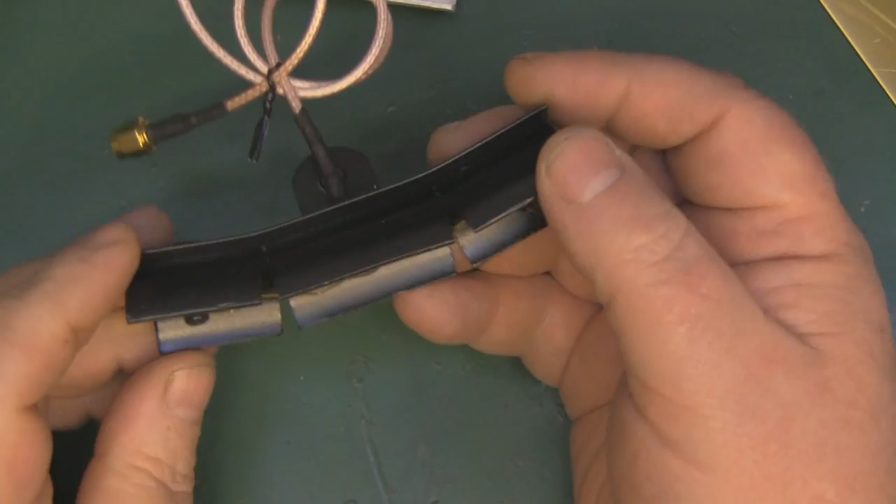So I've got a new antenna design that I want to share with you in this video. It's a double biquad that I've designed specifically for FPV at 5.8 gigahertz.

Now it's pretty unique because what I've done, I've bent the reflector as you can see here, and what that allows the antenna to have is a much wider beam width, which is what a lot of people who fly FPV, especially quite close in, want from an antenna. They want quite a bit of range, but they also want a much wider beam width, and sometimes that's pretty difficult to achieve with some antenna designs.

So I came up with this design after I made the latest biquad build that I released. I filmed it in between Christmas and New Year, but I only released it a week or so ago. But this is the idea that I came up with off the back of that design.

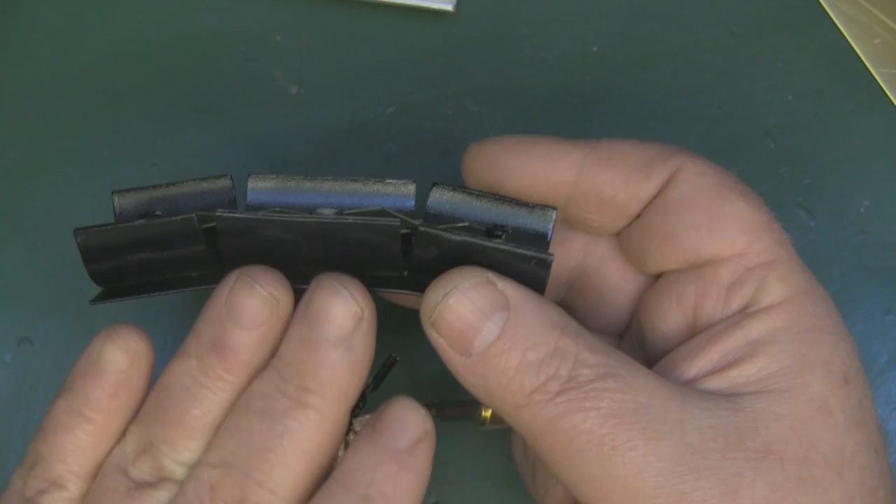So it's going to be a bit of a long video. I'm going to show you all the steps that are involved to produce one of these double biquads for FPV. So let's jump straight into it then, and I'll show you some of the materials you're going to need on the bench.

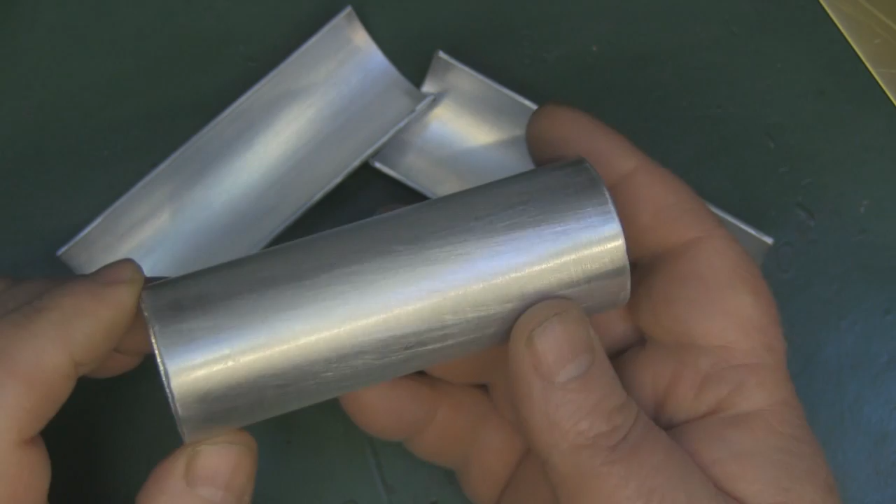So the main body of the build for this antenna then is some aluminium tubing. Now this aluminium tubing I picked up off eBay. You can pick up meter lengths of this pretty cheaply, and it's 34 millimeters in diameter with a 1.5 millimeter thick wall, and you need to cut off a section that is 100 millimeters in length.

Now the next thing you're going to have to do is cut the tubing in half. If you've got access to a bandsaw, it's pretty straightforward to do on a decent bandsaw with a metal blade. I cut this in half using the Dremel and a cutting wheel, but again, even if you've just got a hacksaw blade, as long as you take your time, it's quite soft material, aluminium - well, this aluminium is anyway, so it's not that difficult to do.

So I think we can move on to the next part of the video, because I don't have to show you how to cut a piece of tubing in half.

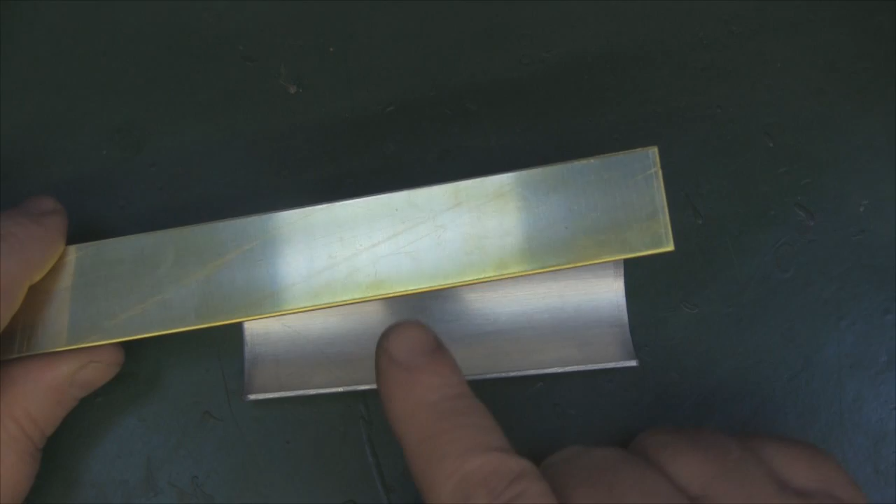So once you've cleaned your reflector up a little bit, I've just rounded off the sharp edges here with a little bit of emery paper. We are going to be painting this, so you don't have to get in there and polish it up. But I've got a piece of brass here, and you can use brass, copper, a piece of tin from a cookie tin, something like that, recycled. It doesn't really matter. You just need something that you can solder onto.

Now, so what I'm going to be doing is cutting off 100 millimeters of this brass strip here. I can't remember how wide this brass strip is - it's 25 millimeters wide, and what I'm going to be doing then is using all my marks where I'm going to drill the hole to rivet this on the back of the brass here. So I'm going to cut this off at 100 millimeters.

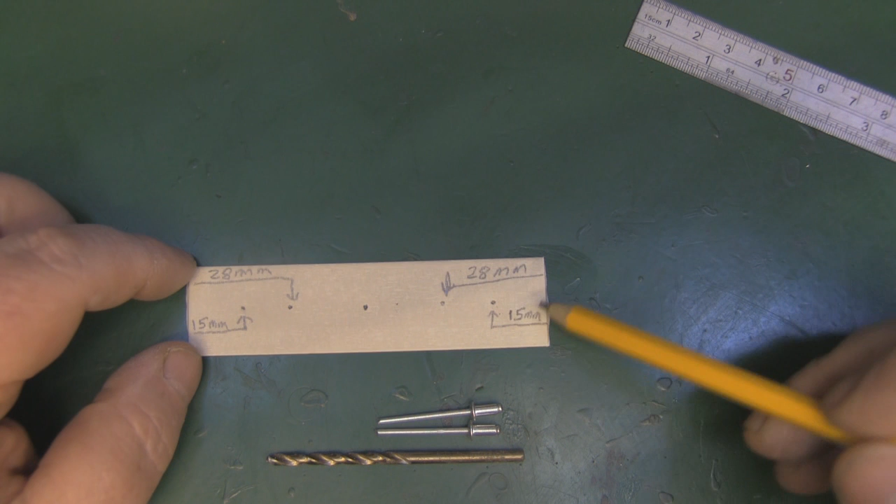So I've marked off where I want my holes on the brass strip here. I've also punched them out as well to make them a little bit easier to drill, and I've written on here the measurements that these holes need to be at. Now the first hole is going to be for the connection for the coax, so that's in the center of the strip. The hole here near the side is the one that's going to be the nylon post that supports the element itself.

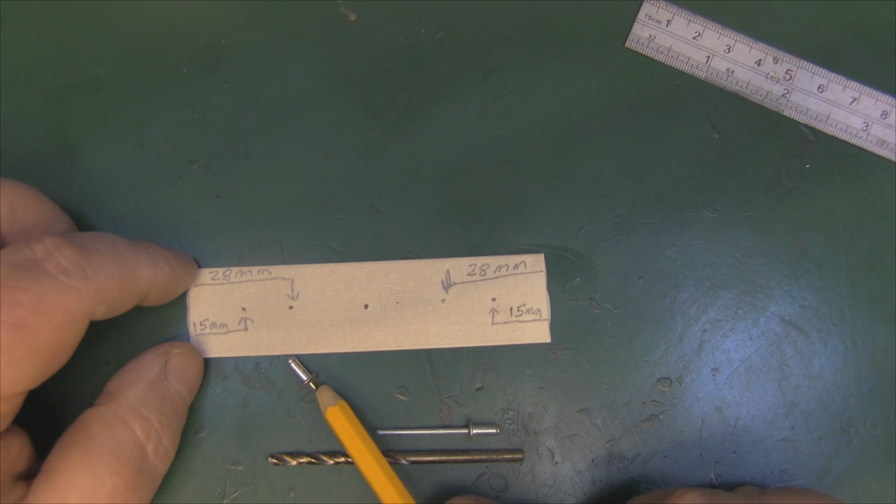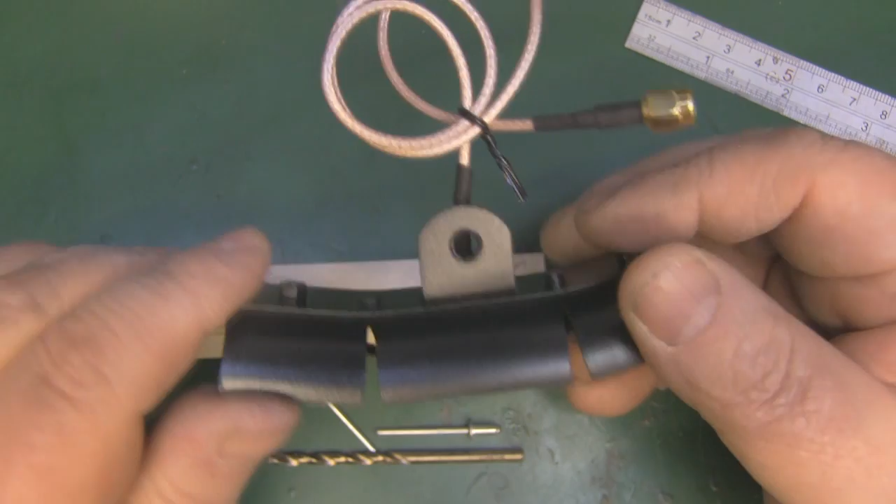And that's 15 millimeters in from the side here in the middle of the strip. The next one is the hole for the rivet we're going to use. The rivets are 3.2 millimeters thick and 5.5 millimeters long, so the rivet is going to go in here, and that's 28 millimeters from the side here. So basically we've got a hole for the rivet here, and then we've got a hole for the nut for the nylon support to hold the element in place, and the same on the opposite side there.

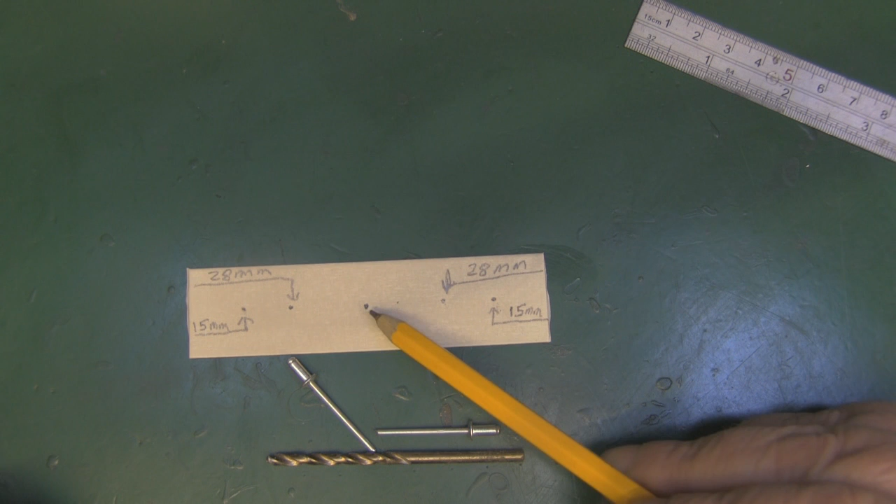I am going to be connecting this double biquad here with some semi-rigid coax, so we're going to do something a little bit different than what we've done on this one. But basically that's where you want to drill your 5 holes here, and I'm going to be drilling the middle one a little bit wider because I'm going to be using some copper tubing to attach the semi-rigid coax to.

But these 2 holes here and these 2 holes here, I'm going to drill with this drill bit here, which is 3.4 millimeters in diameter, so just a little bit bigger than the rivets themselves, and that's plenty wide enough to connect the nylon post to as well.

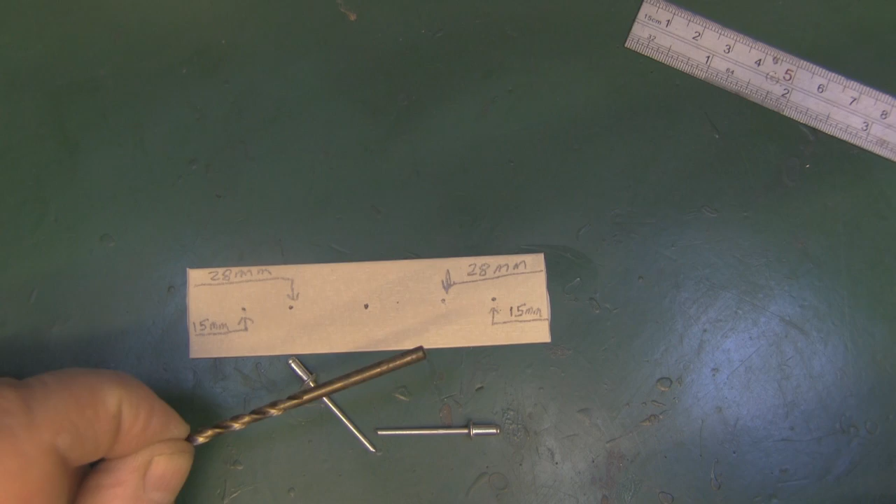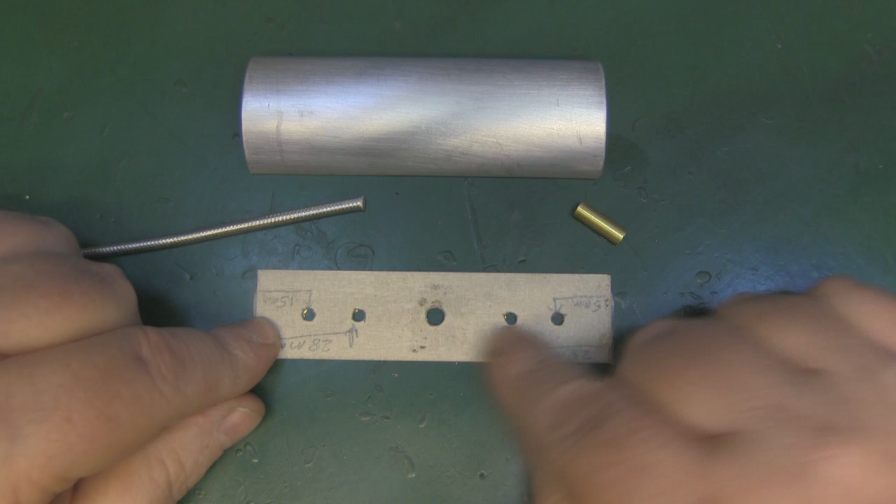So I've got all the holes drilled in the brass plate now, and I'm going to use this much thinner brass tubing, which is 5mm in diameter. It's just a little bit thinner than the copper, so it's easier to work with and solder in place. That's going to hold this semi-rigid coax, add some strain relief, and hold everything nice and secure in place.

I've drilled a hole through the brass plate there, the same diameter. So what I'm going to do now is attach this to the reflector with some masking tape, and use this as a template to drill the holes in the reflector. But then what I'm going to do is remove this and cut the little slits down the side of the reflector to get that angle, to get that much wider beam width.

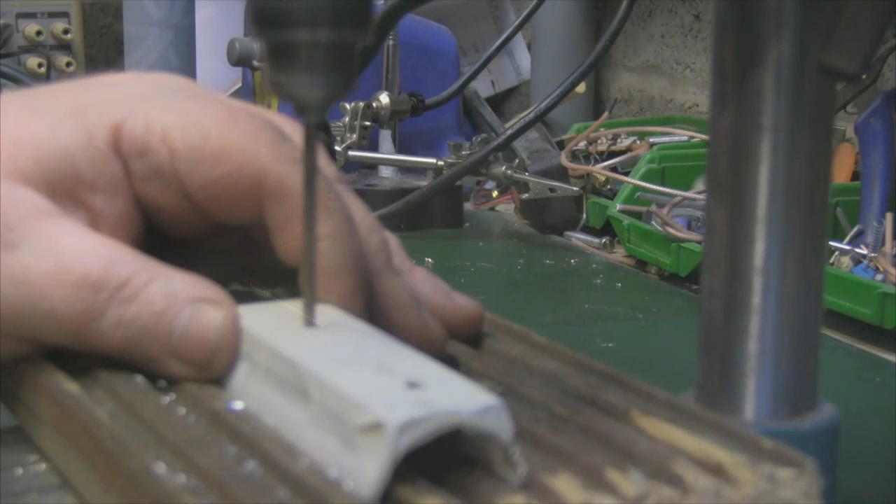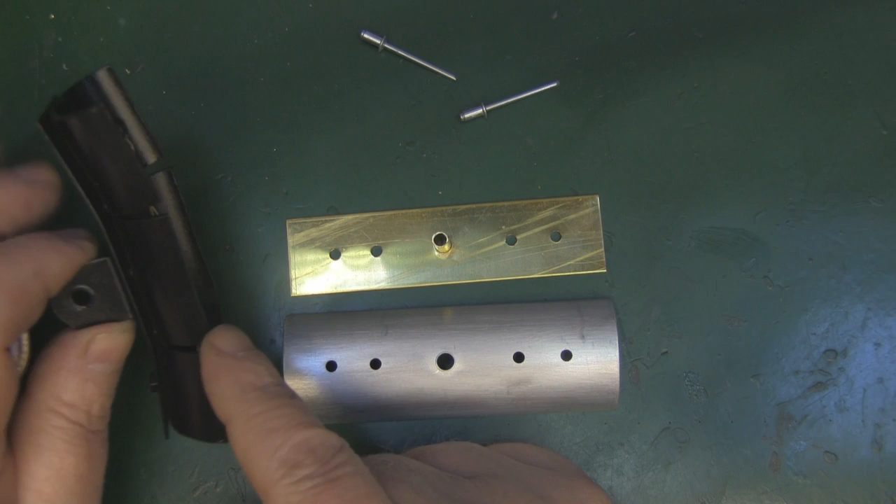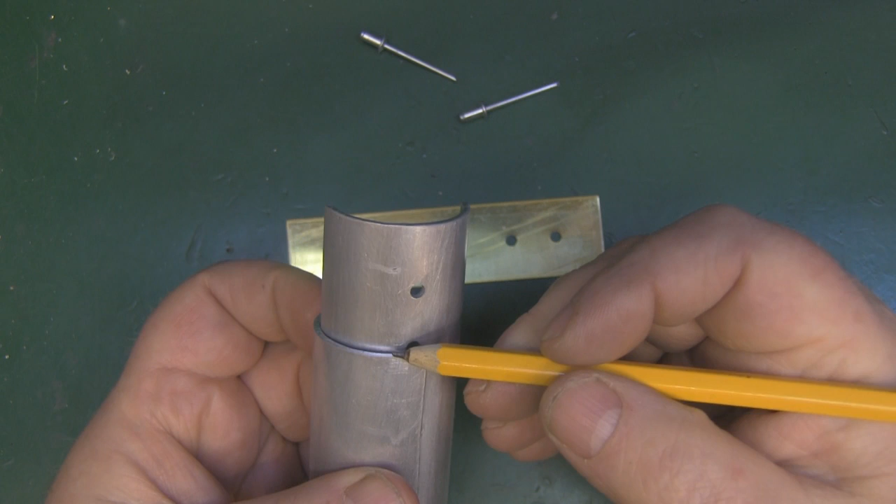Before we go ahead and permanently attach the brass strip to the aluminium reflector, we need to cut out a slot like I have here, so that will enable us to bend the reflector back to increase the beam width of the antenna. Now I want to leave about just over 10mm, 12mm width across here and here that I don't cut into.

One thing you can use to help you get a nice straight line around this curve is to get the second reflector that you cut, the opposite side of the tubing here, place it over this one, line it up about center with this riveted hole that we're going to rivet in place, and then you can draw a line down here and it'll be nice and straight like so. You can do the same on the opposite side as well, and that'll give you a nice guideline then where you can cut out your slot.

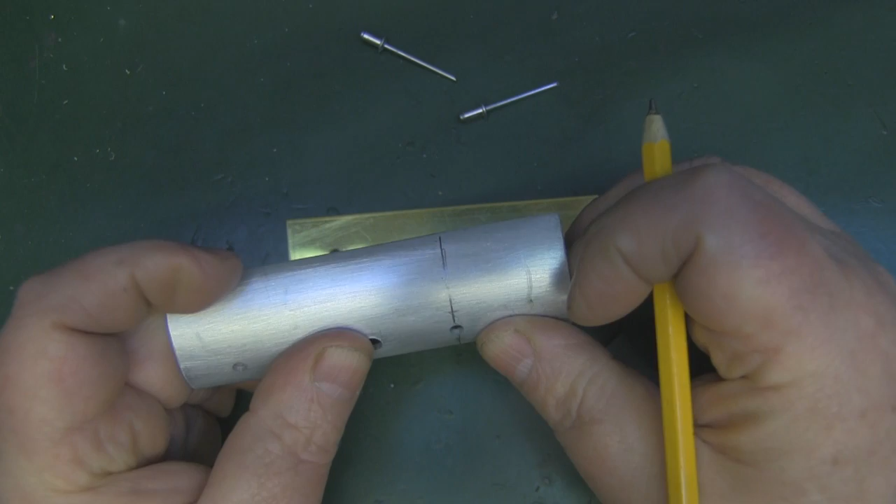But remember, we need to leave about 10mm or 12mm here and here where we don't cut into, and that will enable us to bend the reflector back to get that increased beam width.

So I'm now ready to start cutting the slits, and if you've got access to a bandsaw with a metal cutting blade, it's pretty straightforward to do on a bandsaw. Unfortunately, I'm waiting for a metal cutting blade for that, so I'm going to use the Dremel. Just have to be careful that it doesn't jump, and make sure you use the Dremel away from you.

But I've got it held in this vise, so what I'm going to do first is just score a line where I'm going to make my cut. And now I'll cut into it following that line there. It'll help guide my Dremel cutting tool here.

So now that we've got the slits cut in the reflector, I've also gone ahead and deburred the sides with this small file here, just gone in there and ran it across each cut that I've done. It just helps to deburr any sharp edges on there. But as I say, we're going to be painting this, so you don't have to worry too much if you scratch the aluminium. I'm going to rivet the brass plate into place now, and then we can put the bend in to get that slightly wider beam width.

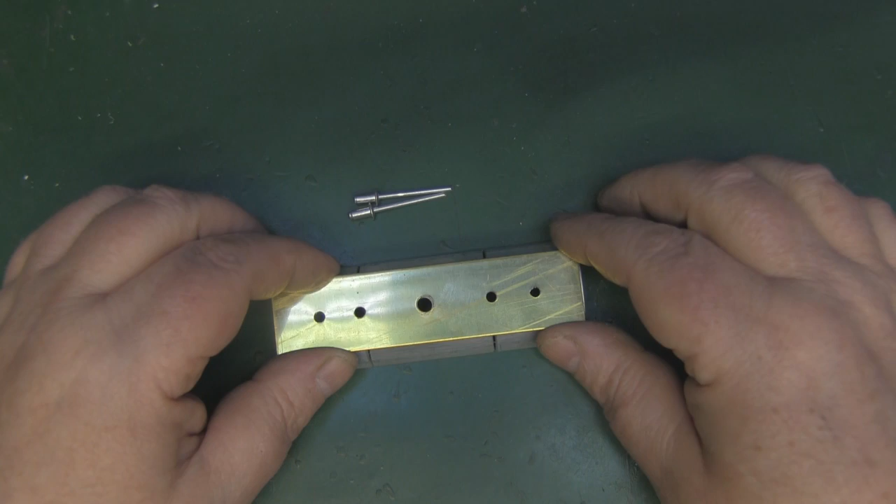I'm going to put the best side of the rivet on the inside of the reflector here, because that's the bit that's going to be on show more than the back of the antenna, just to give it a clean look to the construction.

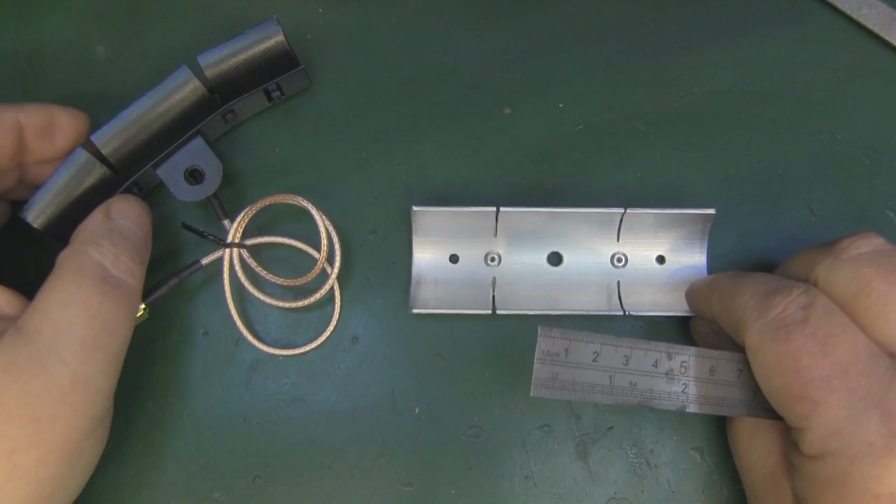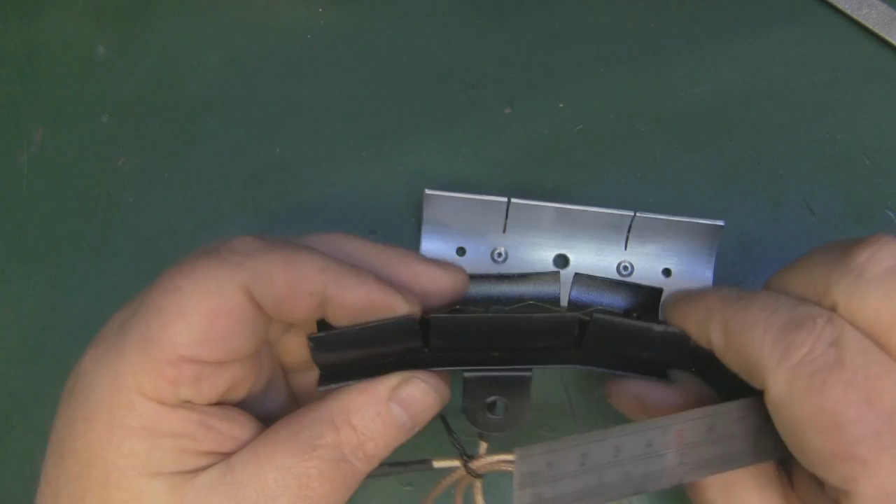So I'm ready to start bending the reflector to give it its wider beam width here, and you want the widest gap of the slits that we've cut in to be around 4mm. Any greater than that and you won't fit the element on neatly, and 4mm seems to be just about right.

So slowly I'm going to bend these. I'm going to use a flat screwdriver here just to help me, and slowly bend them out. Just a little bit more. So that's about right, about 4mm. So now I just need to do the same on the opposite side.

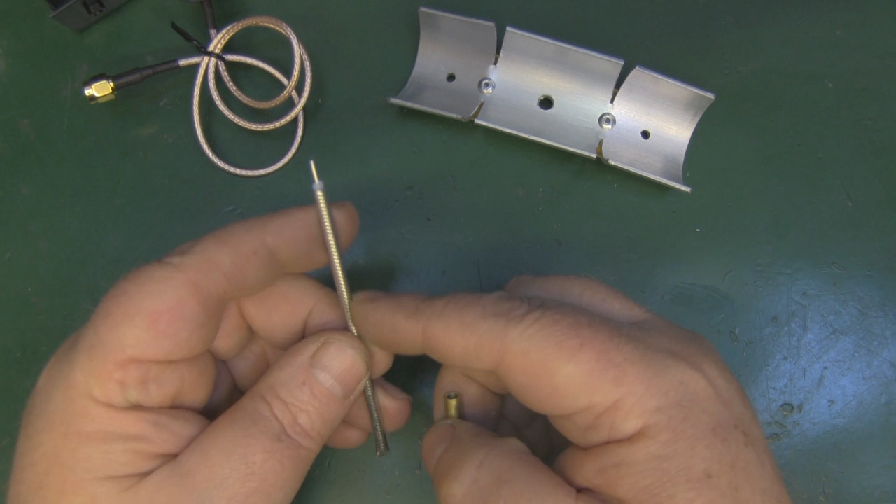So I'm going to solder the brass tubing onto this piece of semi-rigid coax that I've got here. It's about 90mm long, and I've prepared it here. I've got just under 10mm of the inner core exposed. I've left a couple of millimeters of the dielectric between the outer braid and the inner core there, just to add a little bit of insulation so we don't end up shorting our antenna out.

And I'm going to solder the tubing here, just here on the semi-rigid coax. Now you may see that this tubing is a little bit wider than the semi-rigid, and I'm just going to solder it on this side here. I'm going to leave this side alone because when we come to attach the element later, I want to be able to stick one of these legs down into there and then attach it with a little bit of solder.

So I'm just going to solder it at the side there and also solder it at the bottom down here. So that's the tubing soldered in place, and I want to show you this detail here. I haven't put solder on this side of the tubing, and I've got a 1mm drill bit drilled a small hole down between the coax and that tubing there, which will give me a nice solder point to place the tube into that hole and melt some solder around there, and it'll anchor it really tightly.

Just going in there and making that hole to give it a good solder connection is a small detail I want to show you. You can also start it off with one of these little picking tools, but I've gone in with a 1mm drill bit to take it down a bit further and anchor it really well in there when we come to attach the element itself.

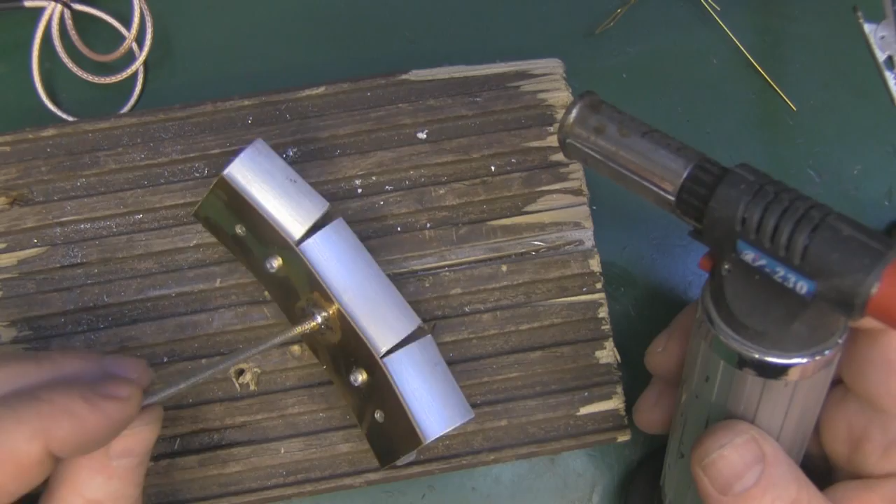So what I'm going to do now is solder this to the reflector, and then we can put some paint on the reflector. So that's the brass tubing soldered in place. It's a little bit too much to ask for a soldering iron, but basically what I did is get the solder in place around the metal tubing with the soldering iron, put some flux in there, and get a small blowtorch like this, get some heat around the brass plate and the tubing, and it will flow in the end around there. So we've got a good secure connection now with the antenna and the coax.

Also, you could build this with the semi-rigid without the tubing, but I don't think, because of friction and everything else, without that little bit of strain relief that the tubing gives you, it will probably end up snapping off. What I'm going to do now is let this cool down, clean that area up a little bit with a wire brush, and then put some paint on this, because I do like the contrast you get with the black paint and leaving the brass element as it is.

So next we're going to build the double biquad elements themselves, and for the elements you can use copper wire. This is some copper wire here, around 1mm thick. I wouldn't use anything thicker than this, but the trouble with copper is it's very soft. So if you do want to build a double biquad out of copper for the elements, you really want to come up with some way of protecting those elements.

So what I'm going to use is this brass wire. It's 0.7mm thick, but it's much more springy, and it holds its shape a lot better if you impact it on anything, because it's much more difficult to bend out of shape than this copper wire here. And between the two, as far as electrical conductivity is concerned, there's not much between them at all.

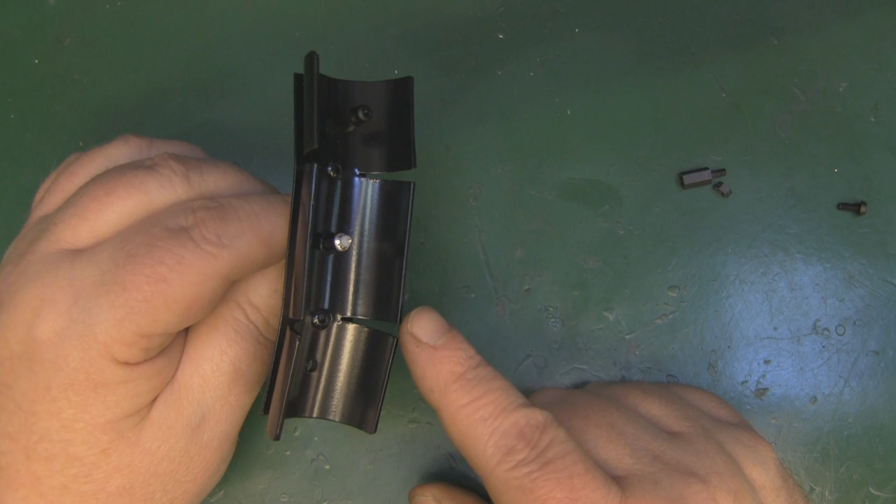So now we're ready to put the element in place. What I've already done is put one of the posts over on this side. I'm about to put the post on the opposite side, and these posts are little nylon standoffs. You can buy these as a kit with various sizes on eBay, and you're going to need a screw, a nut, and one of these standoffs. These standoffs are 10mm long. Now, the distance the element needs to be from the reflector on a 5.8 GHz biquad, I think off the top of my head, is around 6.5 to 7mm, or around that size. But because this reflector is curved, I've taken it as an average and set the element 10mm away from the back reflector.

So I'm now going to use one of these posts. I'm going to insert this one in here, lock it off on the back with the little nut, and then I can insert the screw onto this side like I have done here, and then we can start and attach the element to the reflector.

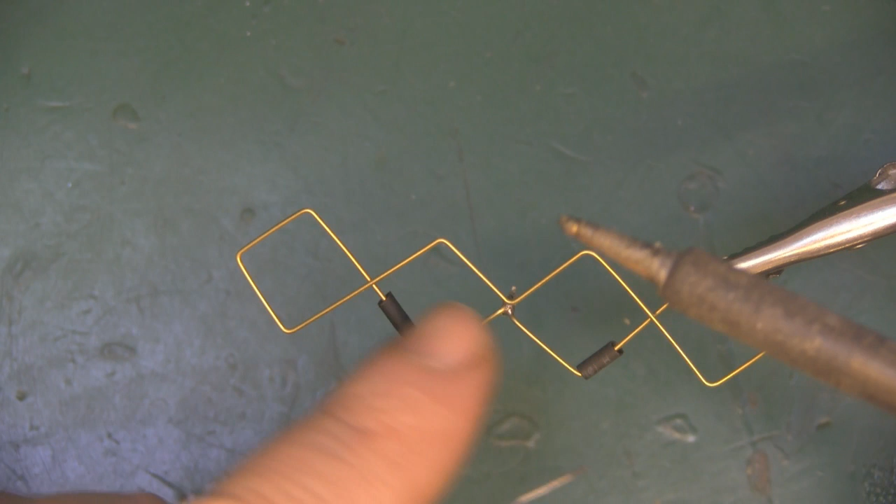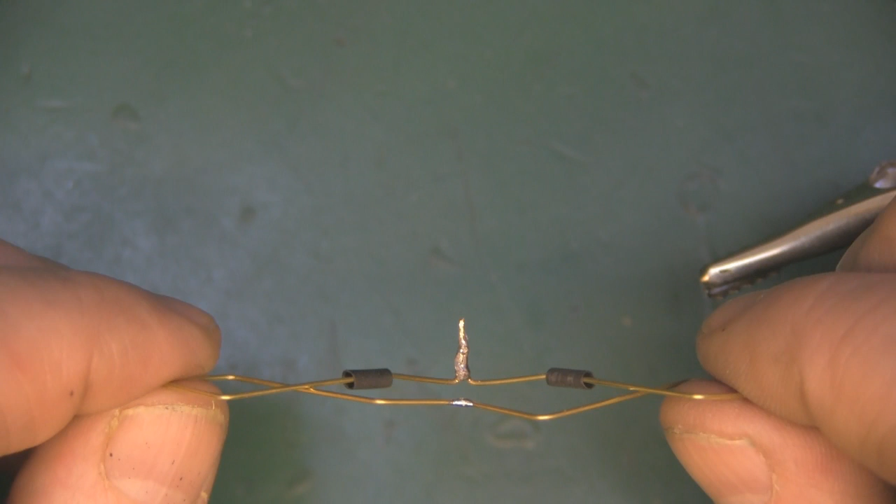So I'm about to add the element to the reflector, but one last thing I want to do first, to make it easier for me, is tin up this point here on the element, because that's where we're going to solder it to the center core of the coax. So a little bit of solder on there, just to pre-tin it. And I've also cut the leg down to size so it fits in the hole that we made with the brass tubing and the coax.

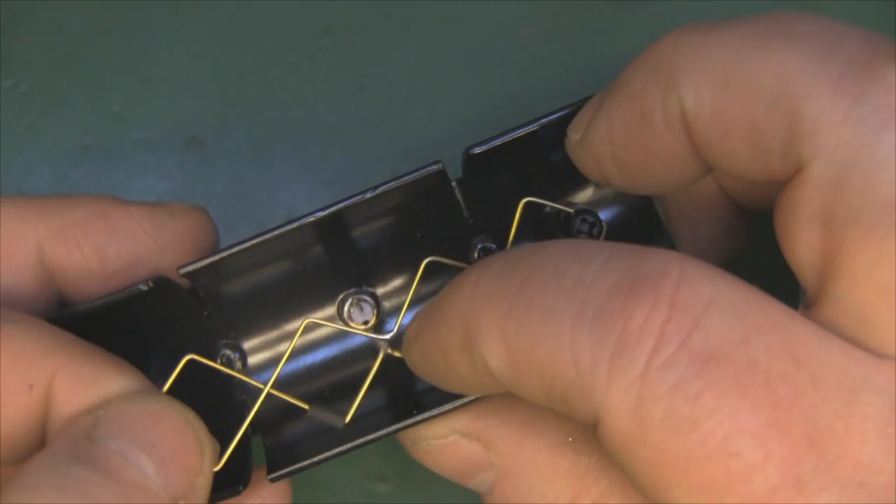So this is the fiddly part, but basically I've got the screw connected on this post here, so I'll put the element around the screw there. That leg is going to go down into the hole we made, and what I'm going to do now is stretch the rest of the element out and then put this screw in on this side. It is a little bit fiddly, but with a little bit of patience it's not too much of a problem.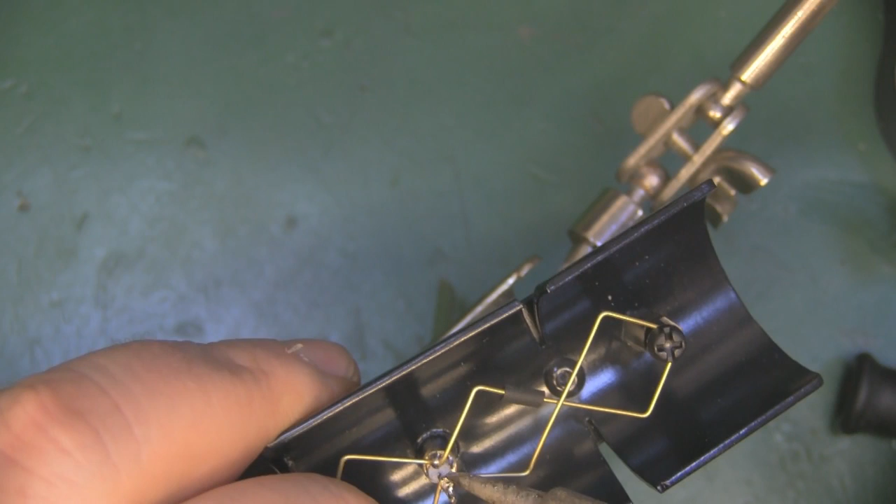Finally, I've got a little bit of solder on the end of my iron, and I just apply a little bit of heat into the leg and the solder should flow. This is why it's important to wrap that wire around those two legs, because this is the point where it would just spring apart.

So now I'm going to tighten both of these nuts down and then straighten it out, and then permanently fix the heat shrink tube in here that stops it from shorting out in place. So that's everything in place now, and you don't want to tighten these screws right down, otherwise it'll make the element jump out of that little gap. You just want to tighten it down so it sits on top of the element itself, and then finally do one last visual inspection around here.

Make sure you haven't got any solder grounding anything out and shorting anything out. I'm just going to put a little bit of epoxy putty in there just to protect the elements and make it look tidier, but also to keep these two points here separate, and then get a little bit of black paint with a paintbrush and touch up around here with the black paint.

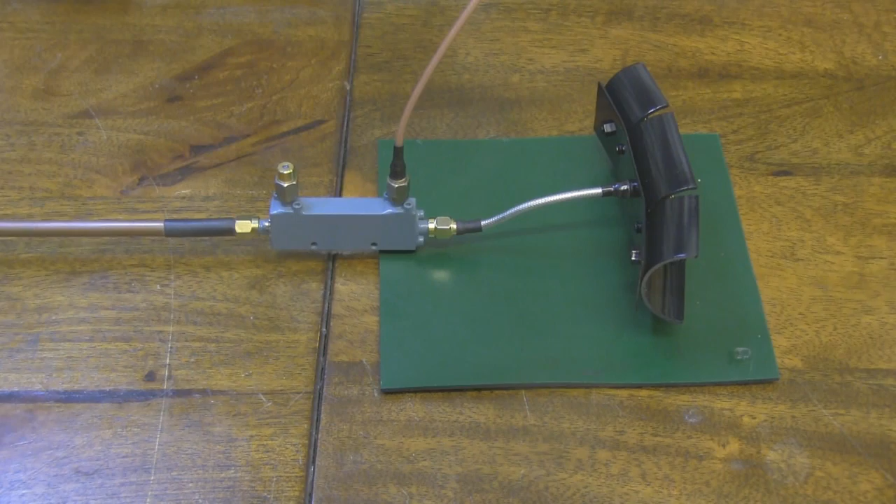So this is the biquad ready to be tested on the spectrum analyzer. We're testing return loss at the moment just to see how well it works on the 5.8 GHz frequency, and if you have a look at the screen, it's looking really nice. And here it is on the spectrum analyzer then.

I've got it centered on 5.8 GHz down the center line here, and you can see why I and a lot of people do love biquads, because they're so wide in their frequency of operation, which means, if you're a little bit off with your measurements, you've got this quite broad area to play with.

So, if you get it off slightly, if the cutoff point's here instead of over here, you can still hit your mark.

But that's a really nice response, and that's going to be such a low VSWR. It really is going to operate fine at 5.8 GHz, just a little bit over, and quite a lot below that as well. I am pretty happy how this antenna has turned out, but possibly in the future I may play around with the measurements slightly to try and shift this a little bit more that way, just to give a little bit more frequency operation around this area here. But as it stands, that's going to be a pretty good antenna.

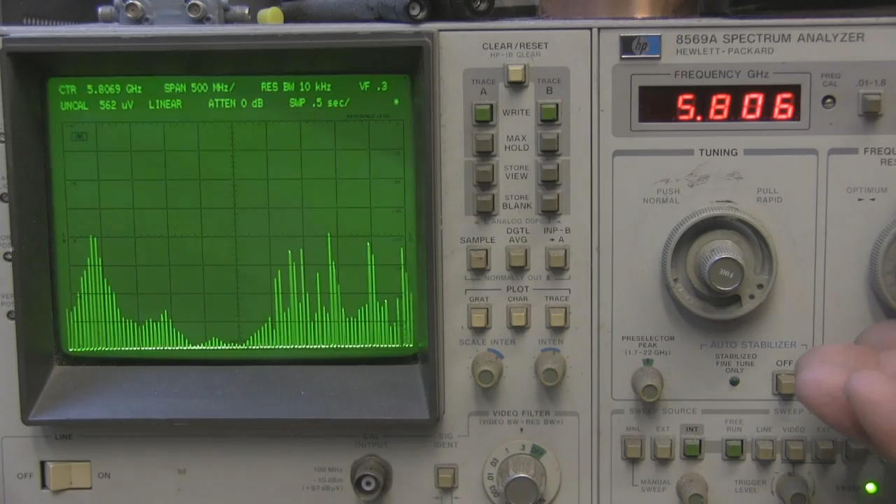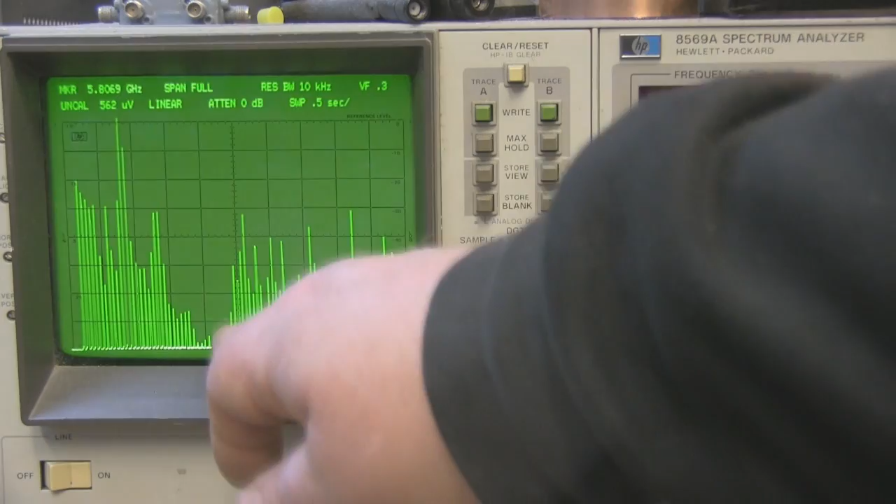And if I change the resolution slightly so you can see it over the band a little bit more, you can see how you've got that nice dip in this area here. So this is the full band here, so it's no longer centered on 5.8 gigahertz now, but it's just off to the side a little bit, and this is its response just here, because it's showing the full frequency span from what have I got it set at, 3.8 to 8.5 gigahertz. So it's just sitting there. It's a really nice response.

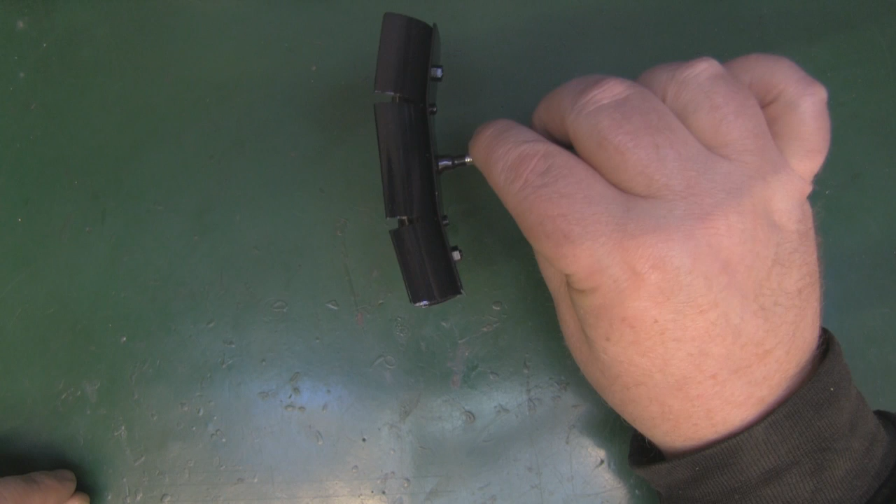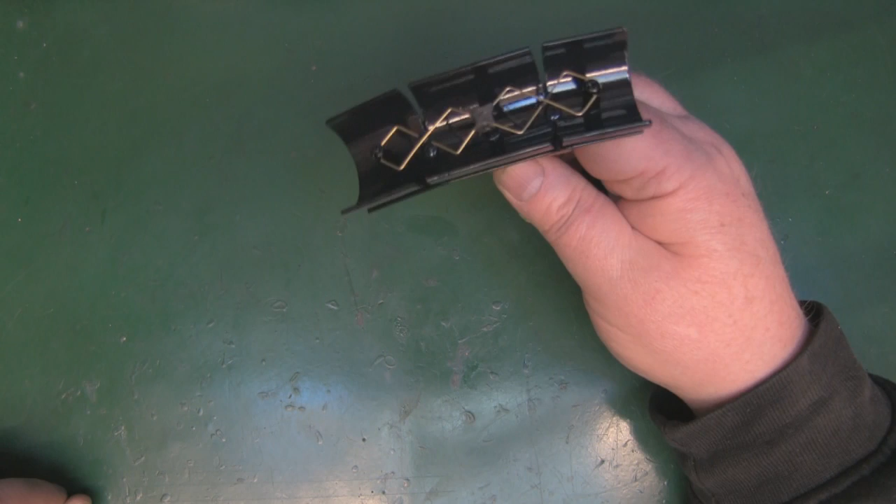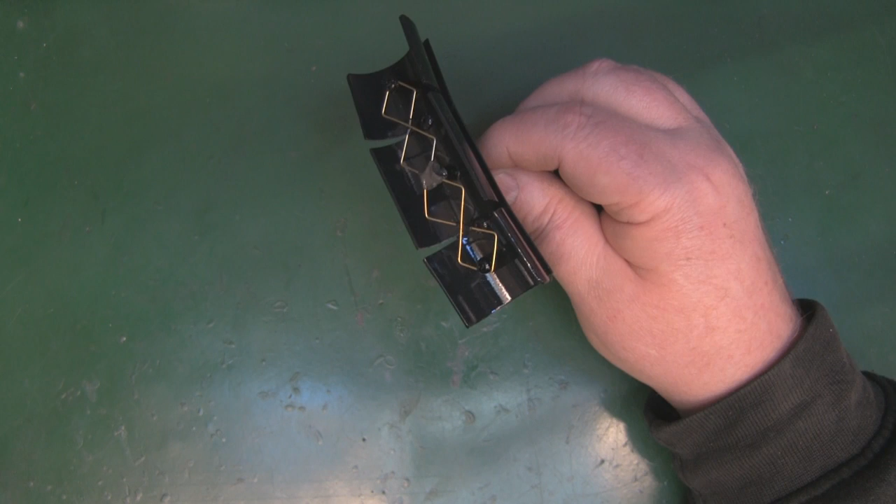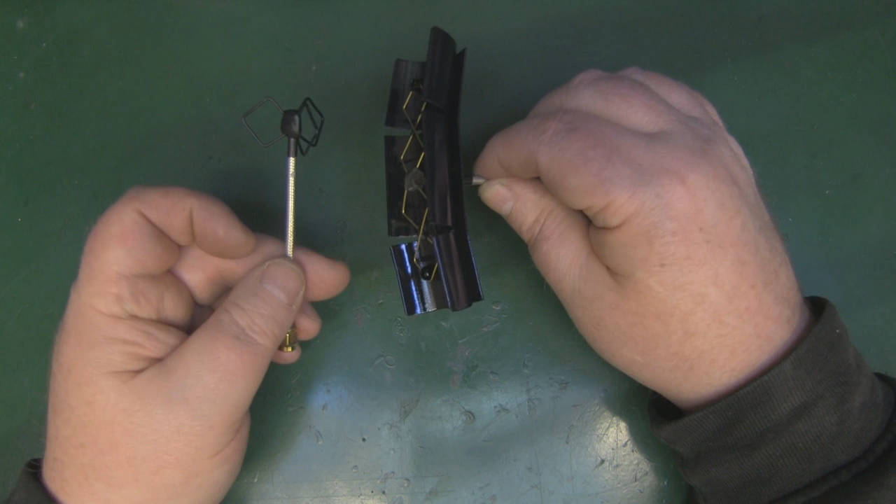I believe I made a video of how to construct this some time ago now. I've never sold this myself, but somebody has been selling these for the past couple of years since I made that video on eBay, and he seems to have quite good feedback on the performance of these. But in conjunction with this, it should work really well.

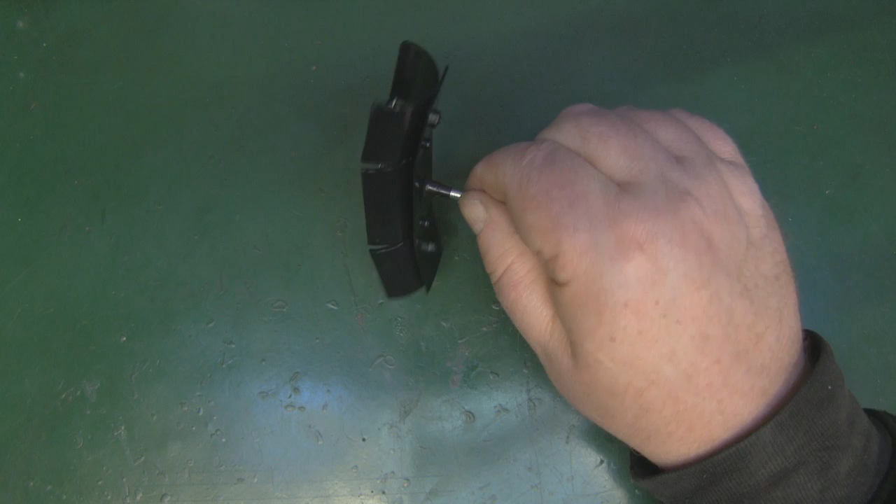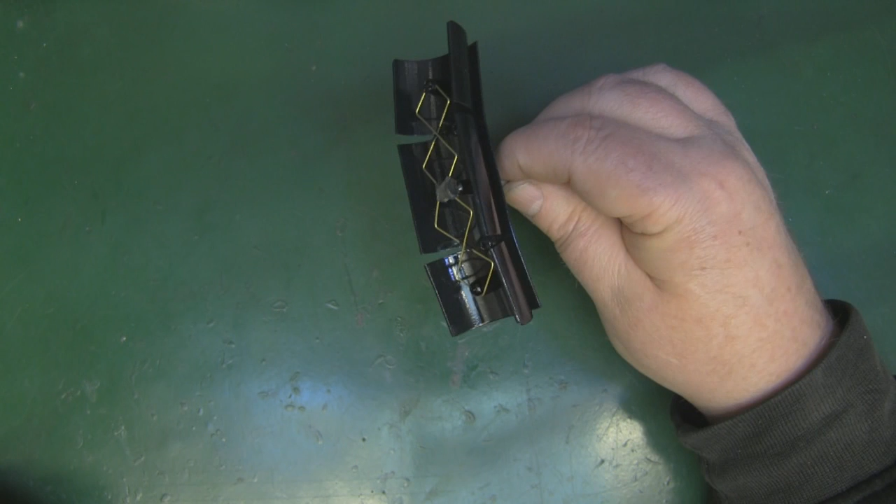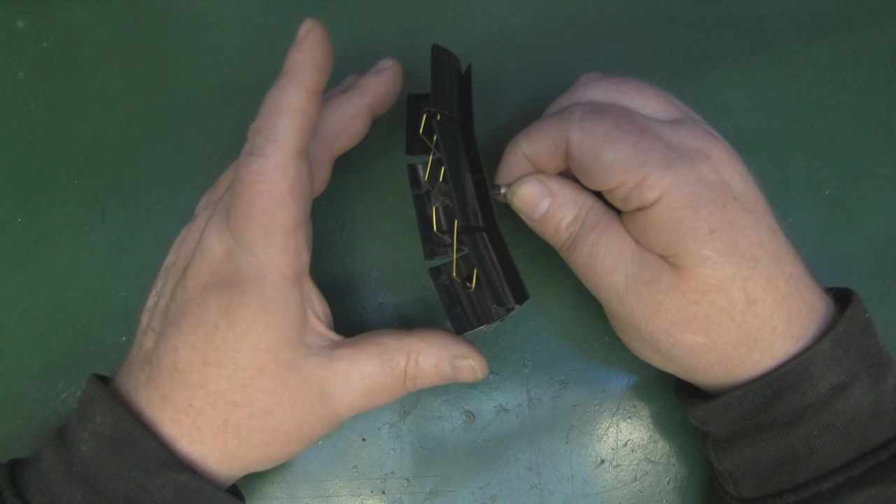And I'll get the network analyzer going as well. I haven't used that for quite some time, but I'll start using that more in videos to test some of these antennas as well. But no, I really like that design, and swept back as well, so you get that wider beam width that you really need for quadcopters.

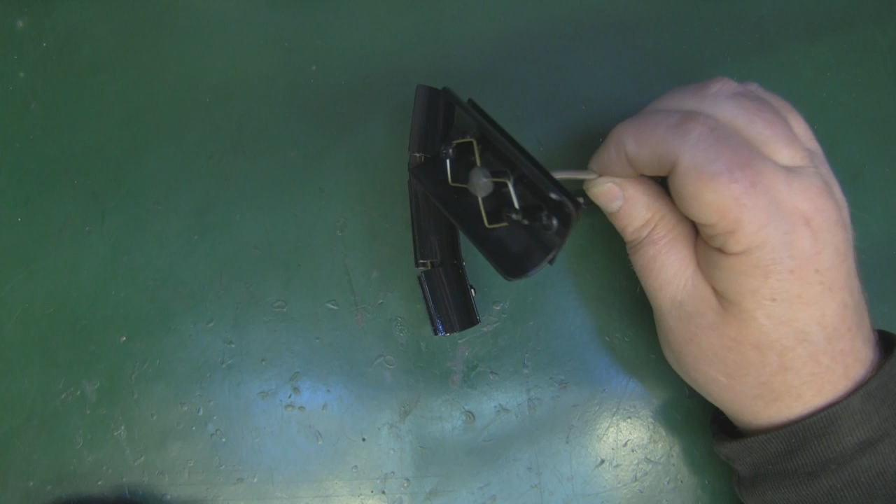And again, because it's made from the same aluminium tubing, because of that thick aluminium reflector, it's going to have an excellent front to back ratio. And then again, when used with one of these antennas, it should perform really well.

But remember, it's linear polarized as well. It's not circular polarized, and to be honest, I don't think there is any way you could make a circular polarized biquad antenna. I've never come across one, and I've never researched, to be honest with you, to see if you could make one. But off the top of my head, I don't see how you could.

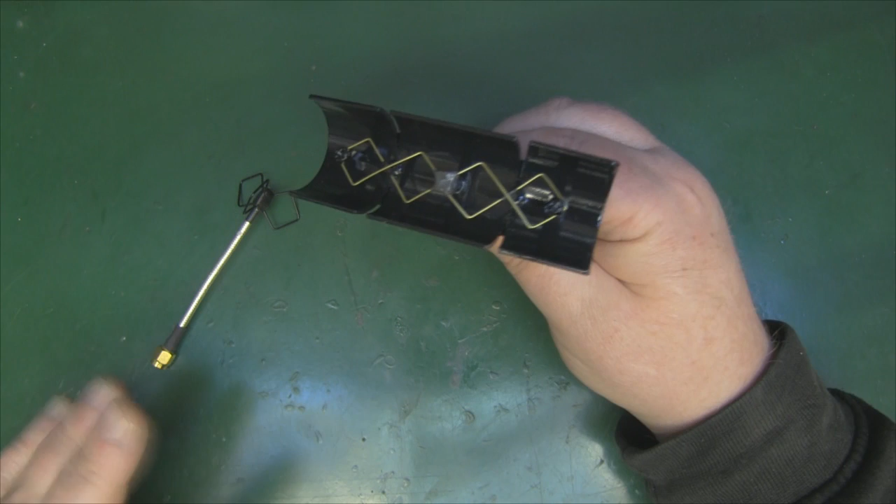So hopefully you've found this video useful, and you have a go at making one of these yourself. I've tried to include as much detail as I can so you can follow along and produce one of these yourself. You don't need any kind of specialist tools really. Just get the materials off eBay, and any kind of rotary tool, it doesn't have to be a Dremel, and you should be able to knock one of these up in an afternoon. But it is a little bit labor intensive. Obviously filming it did take me quite a long time, but even just making these, it doesn't take more than a few hours.